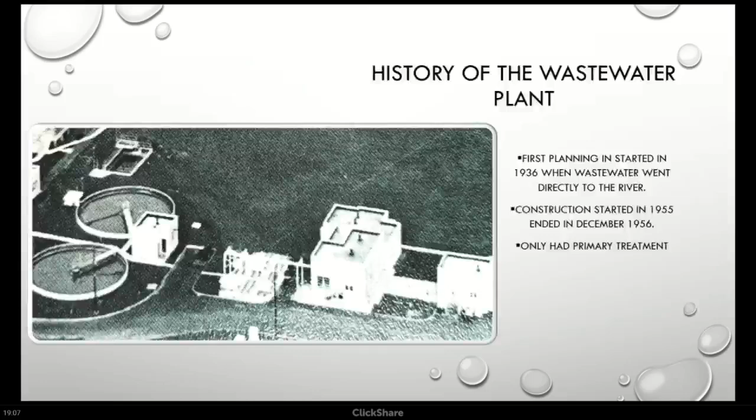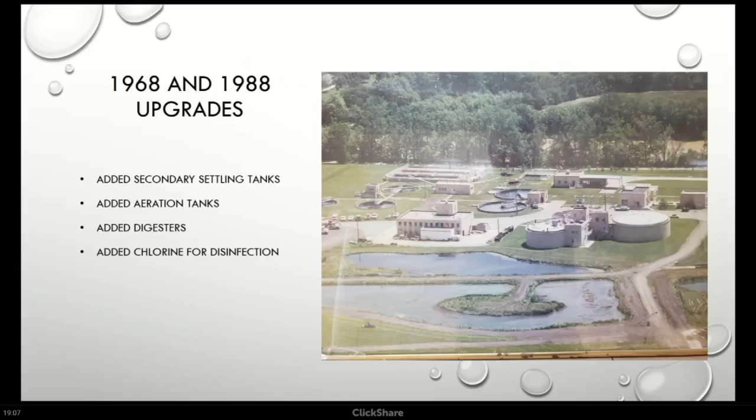And then the first real upgrade was in 68 where they added secondary treatment. So the plant kind of looked what it looks like today in this picture, but this is after the 88 upgrade as well. In the 60s, they added, like I said, secondary treatment, chlorine for disinfection because there was no disinfection used at the time. And then in the 80s, they added a 3rd digester and a new chlorine facility and the maintenance building.

In 2015, the city decided to revise the long-term control plan. The long-term control plan at that time called for complete separation. So after seeing that the city didn't want to separate downtown just because of the mess that it would make and the burden that it would put on all the local businesses, it was decided to only do a partial separation, so leave the downtown area combined.

And the plant itself was looked at in 3 different phases. So phase 1 upgrade would be updating the screening and aeration system. And then the 2020-2021 project was to increase the plant capacity from 4 million gallons to 13 million gallons, which included several new buildings. I have another slide that'll show some of that. And then the 3rd phase, which we're in the planning part of now, was to be an EQ basin, which is what was agreed to in the long-term control plan.

But since then, we've changed our mind on how we can treat a higher quantity of stormwater more efficiently, with cloth media high rate treatment plants. That'll allow us to treat 24 million gallons on a continuous basis, where if you put an EQ basin in and you have a storm event, once that EQ basin is full and the plant is running at max capacity, you're kind of stuck. You really can't do anything with the additional stormwater, where now with this high rate treatment, we can continue to treat 24 million gallons a day.

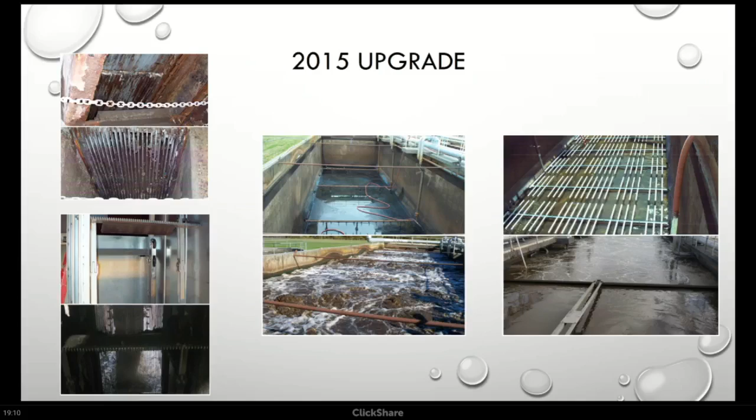And the middle picture is the aeration system before the upgrade. You can see the bubbles on the top of that. That bottom middle picture shows the coarse bubble diffusers, how turbulent the water was, whereas if you look at the pictures on the right, the bottom right is with the same air on, but it's the fine tube diffusers that you can see in the top right. The finer bubbles give better oxygen transfer, so you're using a lot less energy to put the same amount of dissolved oxygen in the water, which is to meet our requirements.

Now with the new generator, it runs the whole plant and automatically transfers. If it senses power out, within 30 seconds, it's transferred over to the generator. And then once it sees at least 30 minutes of stable, normal power, it switches back to the regular power source.

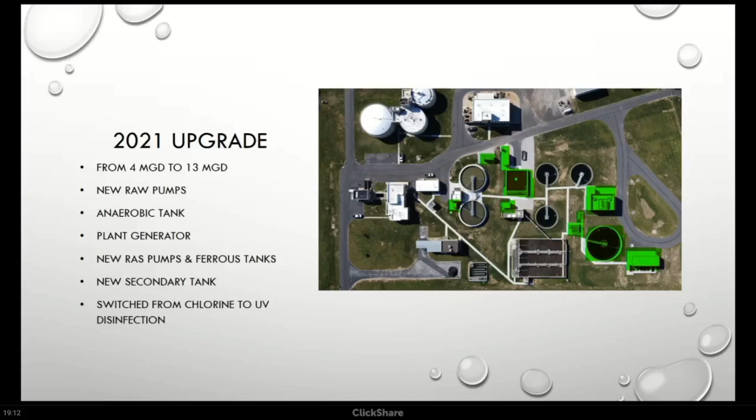This is another thing that we did in the 21 project. We updated our SCADA system. So we can view the SCADA system from anywhere that we have internet. Like I could pull it up on my phone. So if we get an alarm after hours, I'm able to pull up our SCADA system, see what's going on, reset pumps, close gates, or reset a fault. Just do whatever we might need to do from home as opposed to going in, which is really nice. And it allows us to view real-time data wherever we're at.

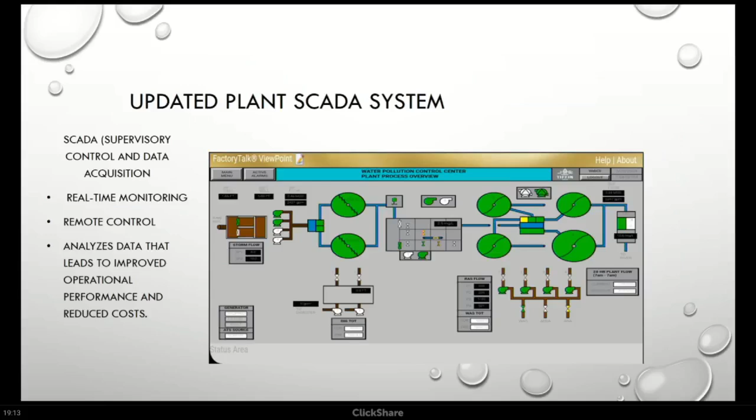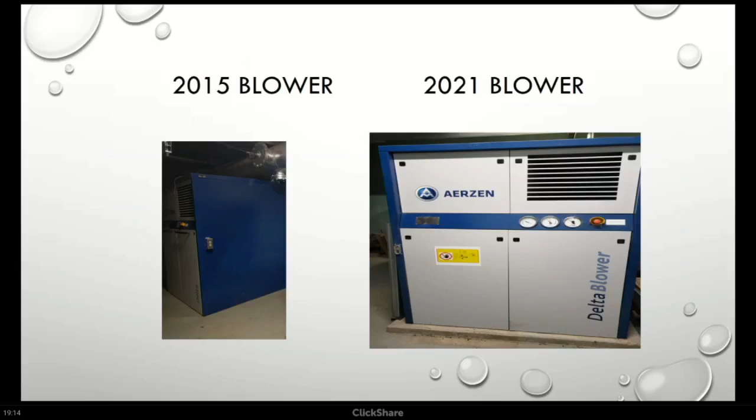And then in the 21 project, we added a smaller high efficiency blower, which is what we run on a normal basis unless we have a rain event where we need more air. But our electric bills since then have dropped down to about $7,500 a month. So they've definitely paid for themselves.

So I had mentioned too, as opposed to the EQ basin, we were looking at this cloth media high rate treatment plant. It's gonna be at a remote location, so everything is gonna be automated and it needs to work when we need it to work. Obviously, a rain event just doesn't come when we want it.

So before the long-term control plan was revised in 2015, we had looked at high rate treatment, but the technology just wasn't where it is today. There was a lot of labor that would go into it because, like I said, you're talking about a plant that isn't gonna run all the time. It's only gonna run in storm events and things like that. But since 2015, the technology has really come a long way, which is what made us look away from the EQ basin to this high rate treatment.

And I have this short video. I know Mayor touched on it in his speech the other day, but this has a little bit more information on what the high rate treatment can do. I just thought it might be beneficial for everybody to see. It's only like a 2-minute video, if it'll play, so let's see.

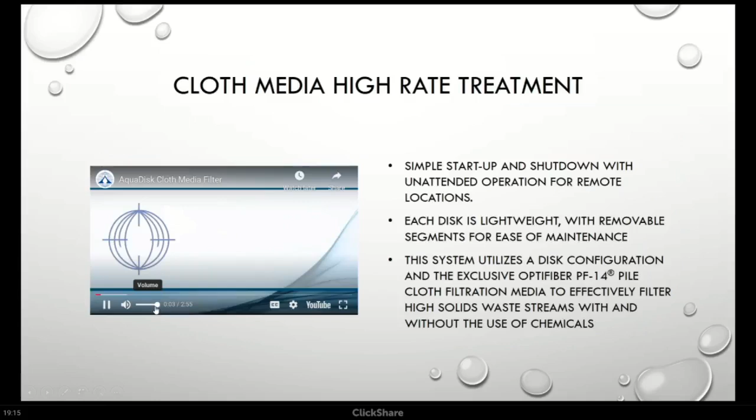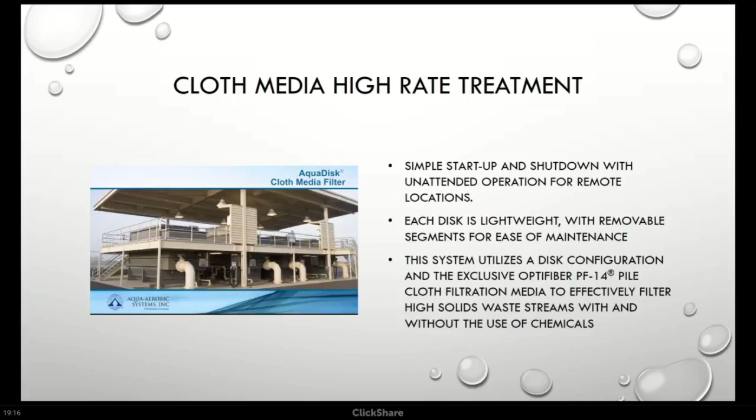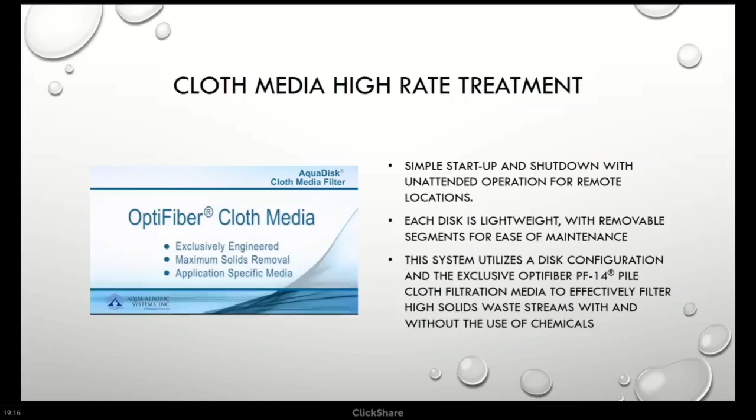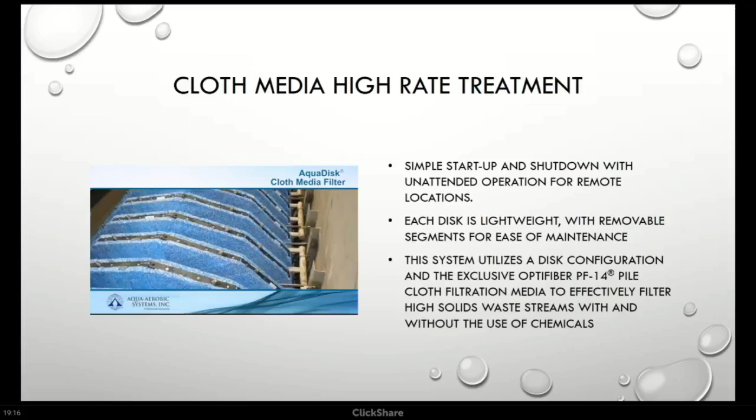Aqua Aerobic Systems cloth media filters have provided the solution for high-performance tertiary treatment for more than 20 years. This technology is capable of low-level phosphorus removal and producing reuse quality effluent. With more than 1,000 units installed, satisfied customers around the world realize performance benefits, cost savings, and ease of operation and maintenance with the AquaDisk compared to other filtration technologies. The main advantage of Aqua Aerobic technology compared to other filters is the exclusive OptiFiber cloth media. Engineered exclusively for water and wastewater applications, only OptiFiber provides maximum solids removal over a wide range of particle sizes, under a variety of conditions. OptiFiber media is suitable for virtually any application and is an integral component of Aqua Aerobic Systems' complete line of cloth media filtration products, including the original AquaDisk.

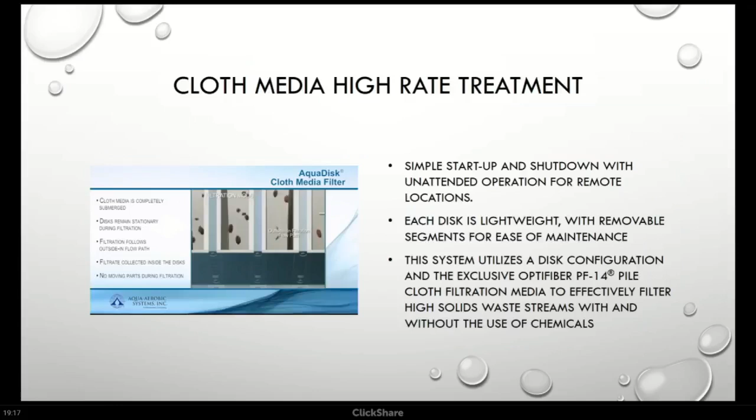Operation of the AquaDisk is accomplished in 3 phases: filtration, backwash, and solids wasting. During filtration, wastewater enters the filter tank by gravity, flowing over the influent weir and completely submerging the static cloth media discs. As influent passes through the cloth on both sides of each disc, solids accumulate on the media and a mat is formed. Filtrate is collected in the center tube, then directed to the effluent chamber and over the effluent weir. Head loss created by the solids mat causes the tank water level to rise, resulting in backwashing or cleaning of the cloth media. At a predetermined level or time, the backwash cycle automatically initiates.

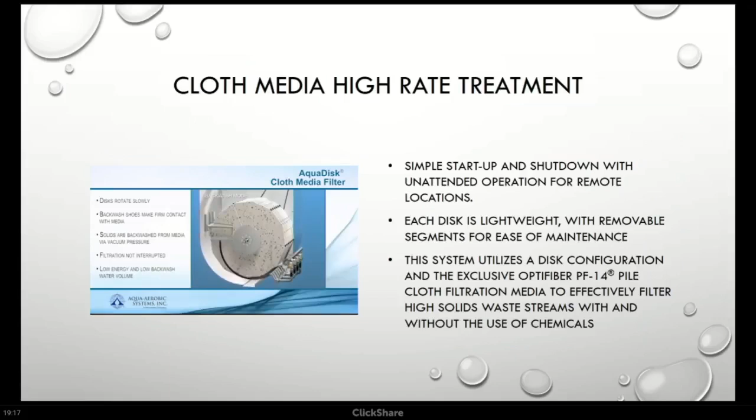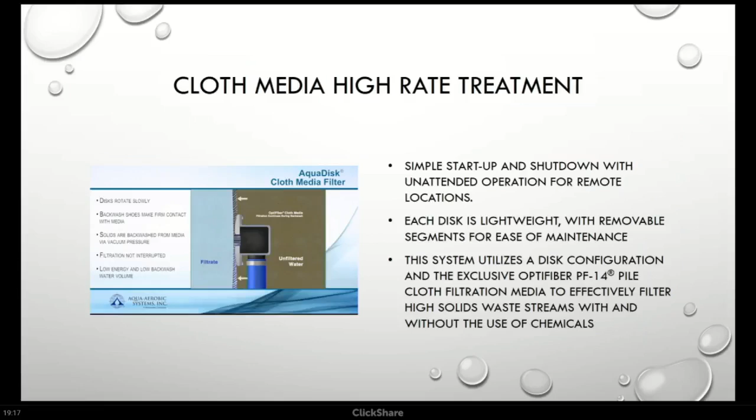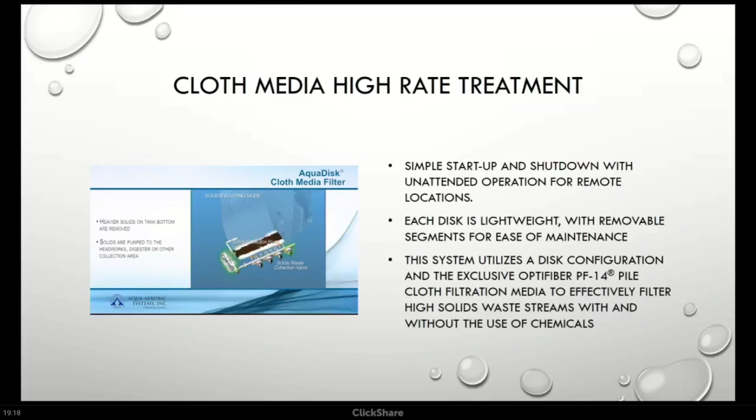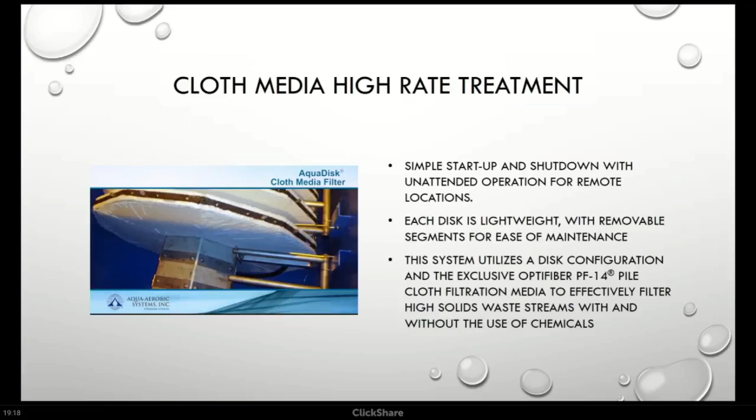Discs rotate slowly and solids are vacuumed from the surface by liquid suction on both sides of each disc. During backwash, discs are cleaned in multiples of 2, controlled by the designated backwash control valve. The backwash shoes make firm contact with the cloth media, maximizing effective cleaning. Backwash water is typically directed to the plant's headworks, while normal filtration continues without interruption. Due to the vertical orientation of the cloth media, heavier solids may settle to the bottom of the tank. These solids are automatically pumped on an intermittent basis by a solids waste control valve back to the headworks, digester, or other solids collection area of the treatment plant. The AquaDisk cloth media filter requires no moving parts during filtration, encompasses the outside-in filtration flow path, and is fully automatic with a PLC-based control system. A history of exceptional operating experience and reliability make the AquaDisk the leading tertiary filter on the market today.

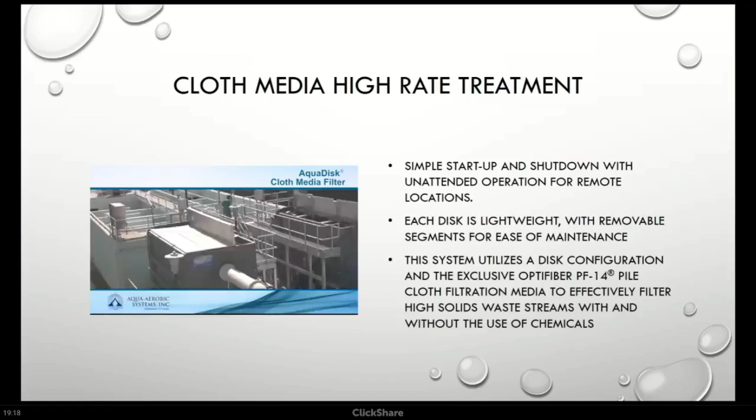Yeah, so Aqua-Aerobic, they make several different things. This was more the AquaDisk, but ours is called the Aqua Storm, but it's similar, same principle. In addition to this part for the high rate treatment, there'll be screening in front of it. And then after the filter treatment, there'll be disinfection. We're hoping to do UV.

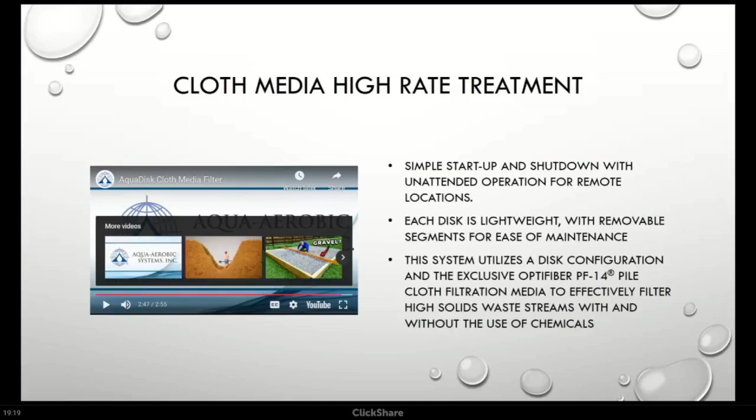And like it was saying, when you pump down those solids, those will go back into the main trunk line and then they'll come to the plant. And anything that's screened out in front of the filters will all go back into the main interceptor and come to the plant. And I know the mayor mentioned this too the other day, having this high rate treatment plant out at a remote location is gonna save millions of dollars on a pipeline taking it from this remote site to the plant, which was the initial plan. So I think it's going to be a win-win, as opposed to the EQ basin.

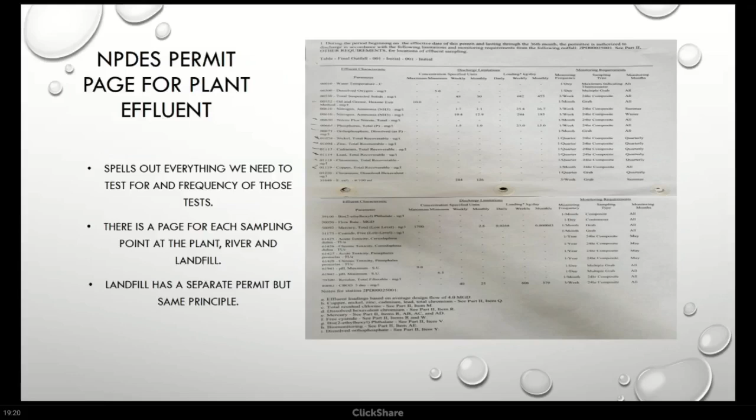So like your water coming in, water going out, upstream and downstream of the river, our biosolids and everything like that. And then the landfill has its locations as well that we have to sample for. These permits are good for 5-year cycles. And then when the permit's about 4 years old, there's additional sampling that's usually done by the EPA. And then they issue your new permit after this one's up.

I didn't really keep track of how many times they pulled pumps throughout the year, because sometimes it's just as simple as a pump's clogged, pull it, clean it, put it back in service. So it's a regular thing for them.

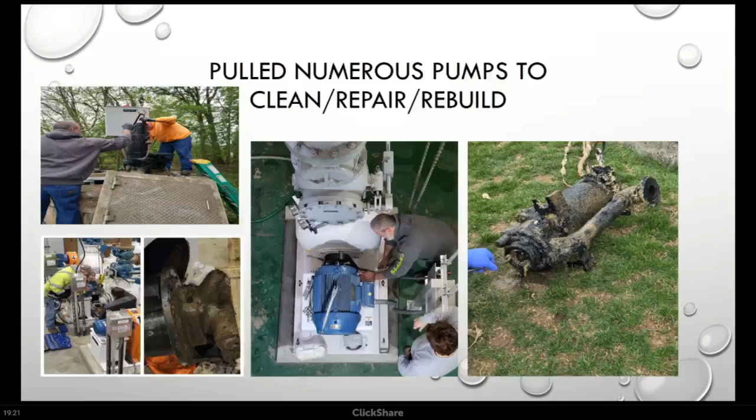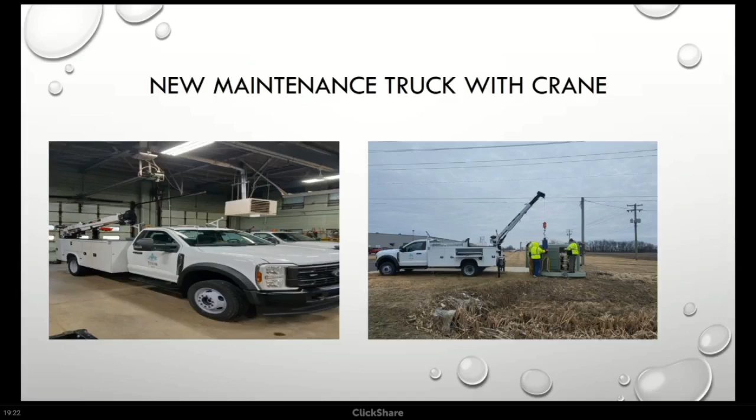So speaking of that, this is our new maintenance truck from '24. This is the first truck that we've had at the plant with a crane, because before what they were doing is bringing our loaders out to lift stations, and we had a crane that was attached to it, which wasn't very good. This is really nice. And this picture is actually from 2025. We ordered this truck in January of '24, but it didn't get delivered until the last week of '24, December 18th or something like that. So anyway, we used it already this year, and it's really working out well.

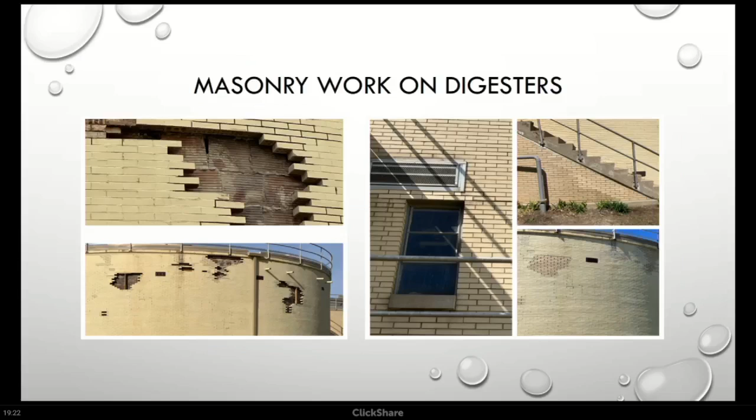Also in '24, we had Great Lakes Construction. They came and they did a lot of masonry work, tuck pointing, replacing brick that had cracked or popped. And this next slide is our dock right outside the main building. It had been in really bad shape for a long, long time, and we had a couple other contractors look at it over the years, but it's actually an open pit, which is our influent wet well.

So a lot of people didn't really want to mess with it because it's only like 4 inches thick. But what these guys did is they chiseled 1.5 inches to 2 inches all the way across it, and then they resurfaced the whole thing, which you can see on the right. It turned out really well and is holding up really well so far.

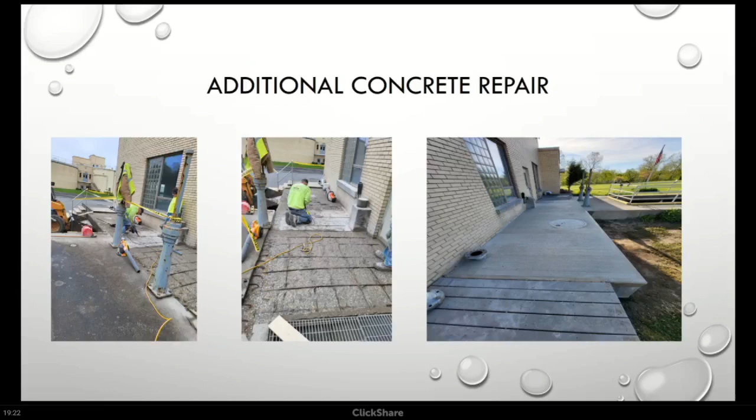So also last year we purchased 2 new-to-us International tractors. They're both 2019. That's for our land application. They're replacing 2 1995 International trucks that both had over 500,000 miles on them. So we're going to be getting rid of those. And these are also automatics, where the other ones were manual, so it's a lot easier for our operators to drive.

And speaking of our biosolids, obviously we bring in a lot of solids to the plant. It's a continuous thing, and getting rid of them is becoming more of a challenge because the EPA is really limiting what we can do on these farm fields.

The other alternatives to land application are incineration and just taking it to a landfill. We land apply liquid solids, so our biosolids that we land apply are anywhere from 5 to 8% solids. To take them to the landfill, you have to get it up to about 15 to 20%, which is expensive in itself because you have to have machine equipment to do that. And then once you do that, you still have to pay the landfill for every load that you take.

So, I've spoken to cities that are similar to us in size, and you're looking at $500,000 disposal fees every year, not to mention just to get the equipment to get it up to the solids we would need. You'd be looking at an initial $1 million investment. So that's why I think it's important to keep up with our land application equipment and keep going the route we are, just because I personally feel like it's the best thing for the environment. We don't need sludge filling up our landfills.

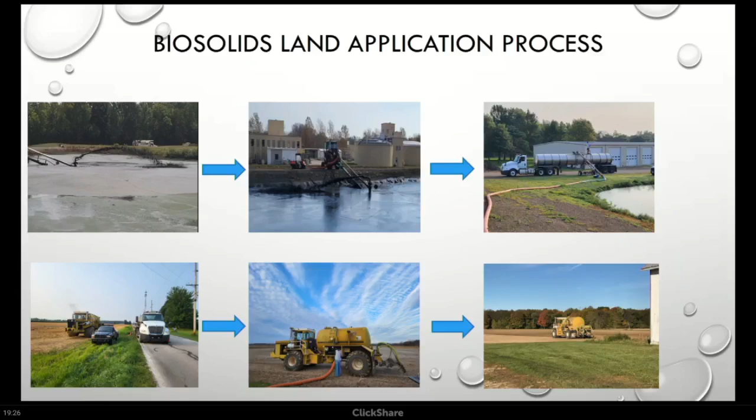So for 2024, this is some of our numbers. The solids are pumped from the bottom of our primaries into our digesters, and we pumped 4,153,000 gallons over to the digesters last year. Then that is pumped out to the lagoons where we dewater as much as we can; any water that comes to the top, we drain off and run back through the front of the plant. So we ended up hauling 1.8 million gallons to farm fields, which, when you dry that out, equates to 362 dry tons. And that was applied to 104 acres. So you can kind of do the math there.

We're about 3.5 tons per acre, where if you go back 5 to 10 years, we were almost always at 5 tons an acre or more. But they keep limiting what you're allowed to put on based on nitrogen and phosphorus in the sludge. So it makes it a lot more difficult if you can only put 3.5 tons per acre as opposed to 5. So you need that much more acreage.

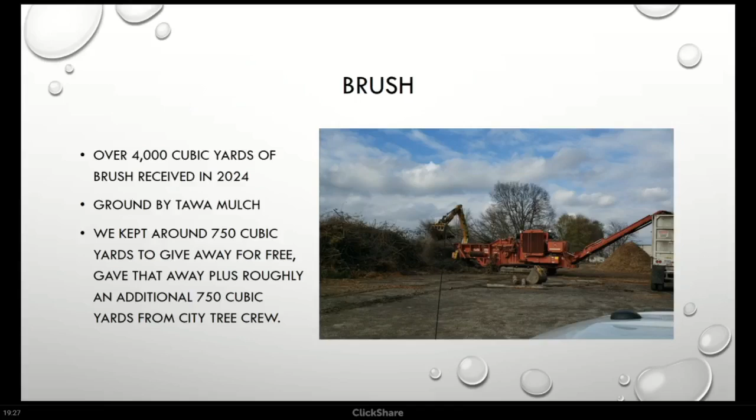Also, we have the brush pile out there at the plant. Took in over 4,000 cubic yards in '24. Tawa Mulch out of Findlay, they ground it up. And we usually keep 20% of that pile to give away to the public. So it came out to about 1,500 cubic yards that we gave away last year in mulch. And that's not just from what they ground up. And then the city tree crew brings additional mulch in all year.

And then obviously the leaf pile as well. We compost that every year. That's given away October 1st. We took in over 396 cubic yards. It broke down to 175 cubic yards.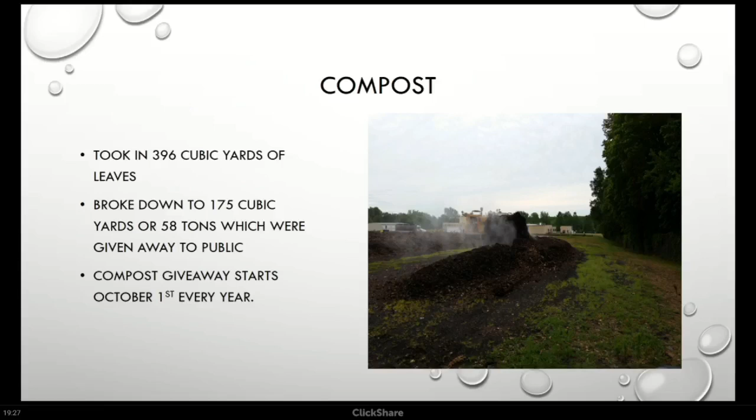And also, our DMRQAs are something that our lab has to do every year. Basically, the EPA sends us samples for everything that we run in-house, but we don't know what the values are. So we have to run them, send them in, and then they basically grade us. We have to fall into a certain range, so we're not too far away from what the actual number was. That's something that we do every year, and our lab guys do a great job as far as that goes.

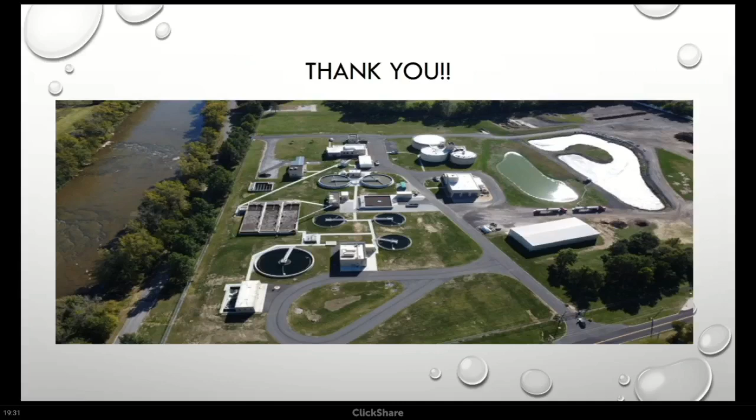I did want to mention, because I'm involved in this as well, when we mentioned the landfill, I think I've maybe brought this up to council before, what we're really talking about is a landfill the city had owned, or still owns. We own the land still, but it's not been a landfill in more than 40, 50 years almost. So it was decommissioned many, many years ago, and we still continue to work with the EPA on what needs to be done in order for us to completely end the testing that's necessary there, to make sure that there's no harmful runoffs going into a wetland that then drains into the Sandusky River and ultimately goes to Lake Erie.

So we continue to work on that, and so far we've been working on a plan on hopefully ending that testing soon. I'm not going to make any promises there. There's always things changing as we work with EPA on that. But between our long-term control plan and what we're doing at the former landfill site, a lot of work with the EPA this last couple of years to get those shored up. So just to reiterate, we have nothing to do with the landfill that's in Seneca County. This is a completely separate landfill.

Anybody else? Yes. I totally want to take the tour, please. I love this kind of stuff. But I just want to say thank you because you guys do so much for our city, and I think it's underappreciated in lots of ways. So thank you so much.

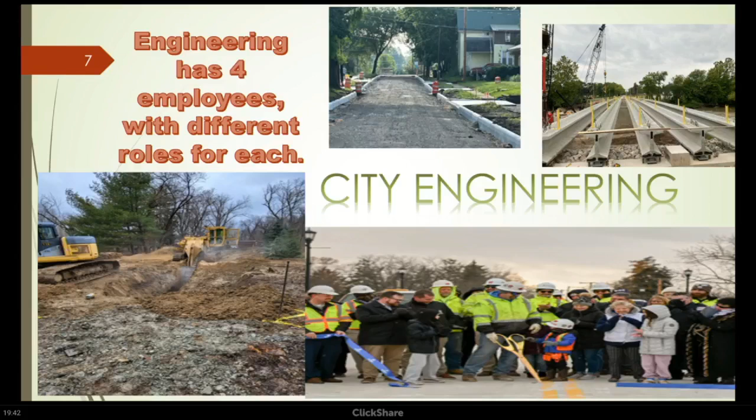Engineering has 4 employees with different roles, as you can see. Again, they amaze me, what they do and how they get it done in the time slot that they have. They just get it done without a whole lot of fussing about it. And they're always in demand. It's not an 8 to 5, it's not a 6 to 2, it's 24 hours.

Finance department, very busy over there. Tax time right now. We'll have a line stand outside, right, Kathy? Pretty soon they'll stand down. They mark off the sidewalk. That's always fun to see. We have the finance director sitting here with us tonight. Payables, payroll, pension benefits manager, sewer, tax department, 7 total employees over there.

Tiffin Parks and Rec, their presentation was wonderful. I mean, their video says so much. I get the privilege of getting to see these individuals when they come in that day. It's a lot of fun to get to learn who they are, where they're from, and they really enjoy what they do. When I talk to them, they really have become great friends and great camaraderie with all of them, and they support each other. It's nice now to see that skating area out there. So not only the summertime is consumed with all this fun, we have the wintertime with that skating.

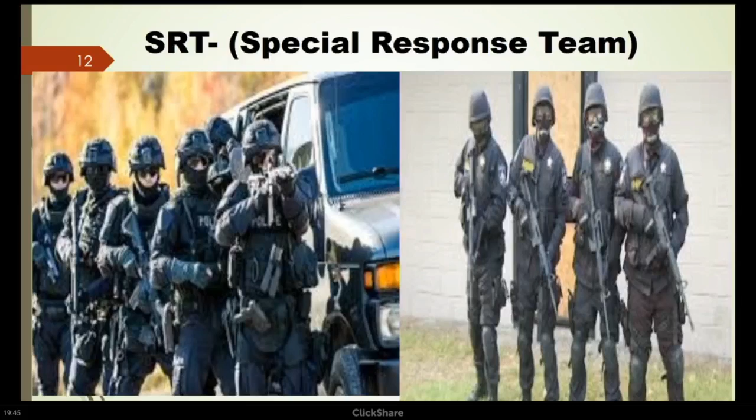SRT, great group of people. I can remember when I first started this SRT group, when I was here, probably not even 6 months, skirt and high heels, came down the hall. They were all in their gear, getting to run out the hall. And I said, hey, and I made them all stop. And the chief turned around, he goes, what? And I said, y'all have a mother, y'all have a family, we care about you, be safe. Thanks, Mrs. Reamer. The chief was not happy with me for that, not at all. But I'll never forget that day. They all turned around like, we're in a hurry, we're on a mission. But I wanted to make sure we put them in here for sure too, because they do a lot that we're not aware about, Secret Service there.

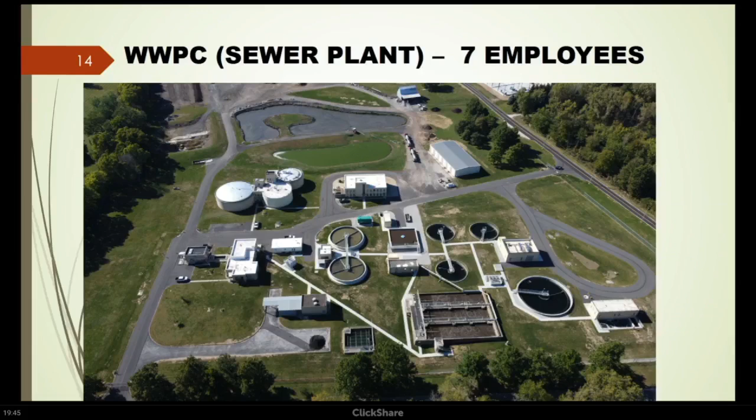Ins and outs for 2024, new hires, 12 full-time, part-time 22. Those are those individuals that come in for the Parks and Rec. Returning staff, 12 seasonal. 2024, the outs, full-time were 11, part-time were 3, includes part-time 1 termination, 2 resignations, includes full-time, we have 2 retirees, 6 resigned, and 3 terminations as well in there.

This is where the fun stuff begins, okay? These are the cost savings that I think no one really sees. We ended up having a PERRP BWC audit last week, which was a surprise. I've been here 14 years, we have not had that since the time I started, but I do attend a lot of HR meetings, and in there they had said, be aware what happens next. Well, little did I know, 4 weeks later they'd be here, okay, and they were. And they visited Kevin's plant as well on that Tuesday and spent over 4.5 hours with him on that Tuesday and Thursday. They didn't spend as much time with me, but we both did very well with our audits. But this is information that I say is internal that not everybody sees.

Decreased frequency, these are your comp claims for your employees. 10 claims in 2022 to just 6 in 2024. That's great. You always want to see it go down, not go up. Lost time on there, medical only totals. 2022 lost time, all 3 years on there. I'm glad to see that that's a 0. Medical only in 2022 was 10. Those are medical only claims, no lost time. As you see, 2023, we only have 7, and you see 6. And that's what we strive for.

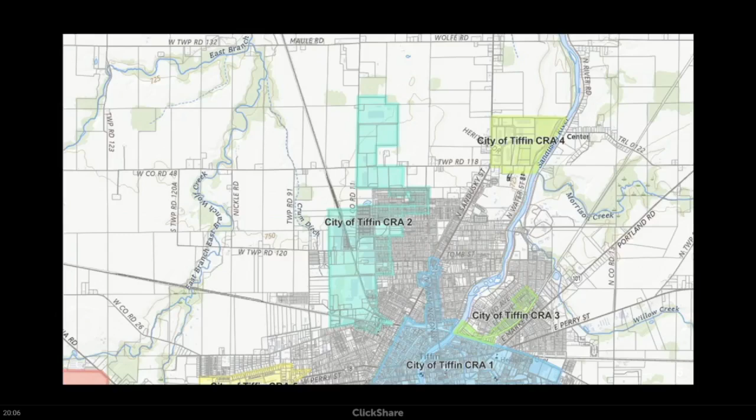CRA number 2, that is up at Eagle Rock. So that is in that area of the city in the north. Number 3 is the next slide. That covers a little bit over there on the eastern end, but that's kind of the Ballreich area over by Lincoln School. And then number 4 is the North Star Industrial Park.

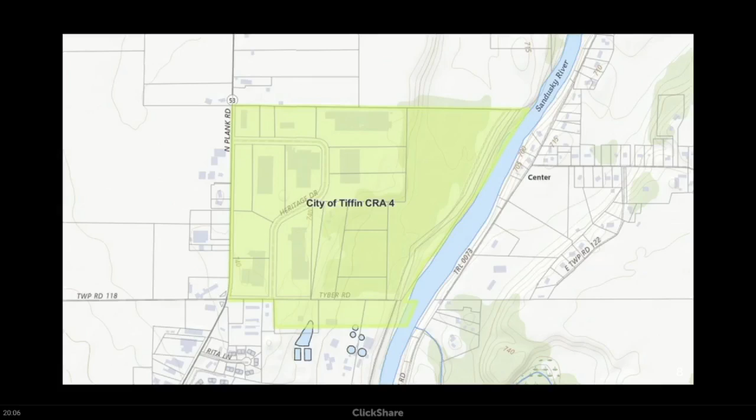Okay. Zach, I don't have a question, but I just want to make a comment. Some of you may know, prior to this, I was at Economic Development and dealt a lot with CRAs. Council, you approved a CRA last year for Hobby Lobby to give them an abatement there. And I'm sure Zach is going to bring it up later, but if you recall, last month you also approved the recommendations of the Tax Incentive Review Council. Again, that is where council steps in and is part of the process to help all those abatements continue to move forward.

And just something to bring up, as Zach alluded to, with these abatements, even though they are abatements, there is still taxation going on. These property owners are still paying the percentage they paid prior to having the improvement on that land. So there are still funds going back to the schools and the other taxation authorities. It's any of the improvements that they do. So if they build a new building or renovate a structure, that is what is being abated. That's the tax they're not being charged for that period.